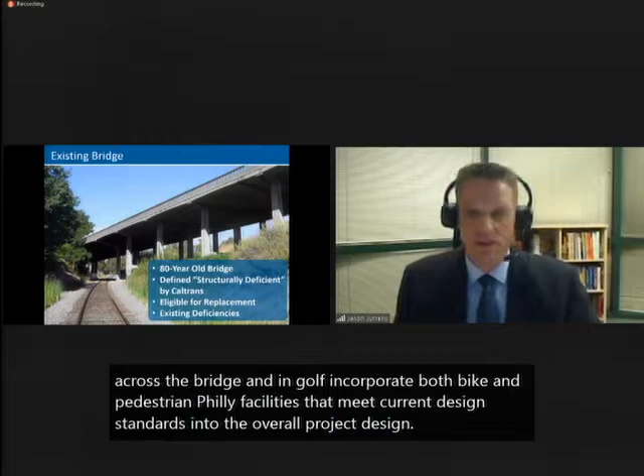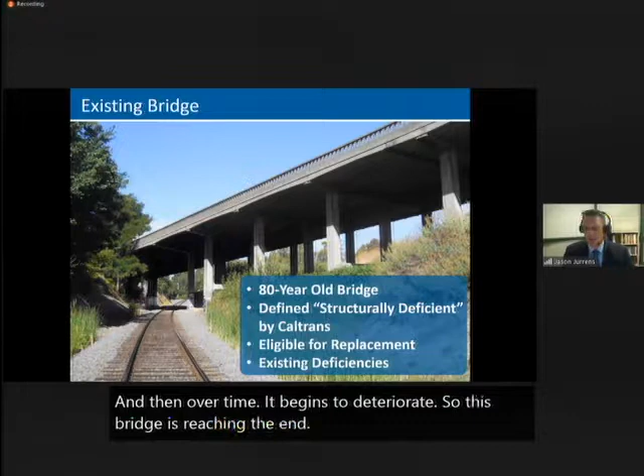So the existing bridge is an 80-year-old bridge. It was built in the 1930s. It is defined structurally deficient by Caltrans. So as all infrastructure ages, over time, it begins to deteriorate. So this bridge is reaching the end of its service life. It is eligible for replacement under a Caltrans and FHWA highway bridge program that will fund a portion of the bridge replacement cost.

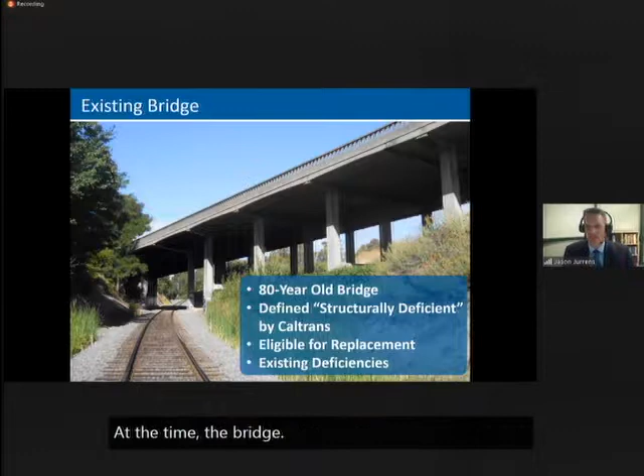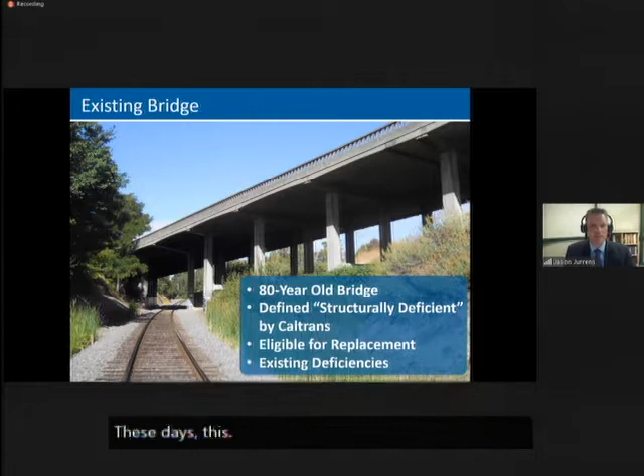So I really like this picture. This is a modern picture, but it could have been taken back in the 1940s. At the time the bridge was designed and constructed, it was really state of the art from a bridge design standpoint, and then also from a railroad standpoint. These days, this would not meet modern design code from a structural standpoint or from a railroad access standpoint. So these will be enhancements that the new bridge will incorporate.

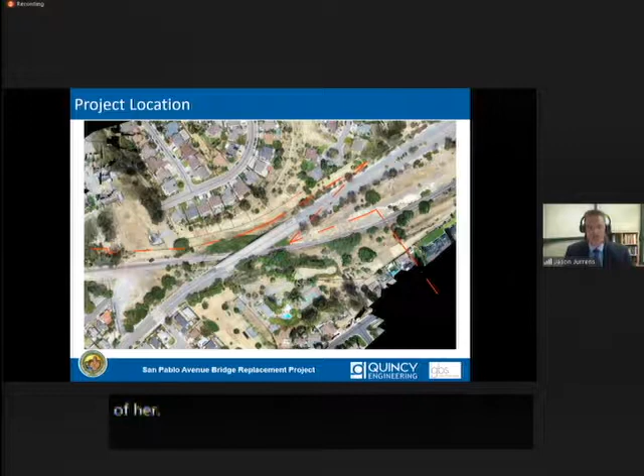So a little bit about the project location. The project, as most folks know, is kind of in the north corner of the city of Pinole. So on the lower left-hand side of this slide, that's the city of Pinole. The red dashed line is the city limits, and then the upper portion of this slide is the city of Hercules. The city of Pinole is the project proponent, but as Misha said, we're working very closely with the city of Hercules as we develop this project.

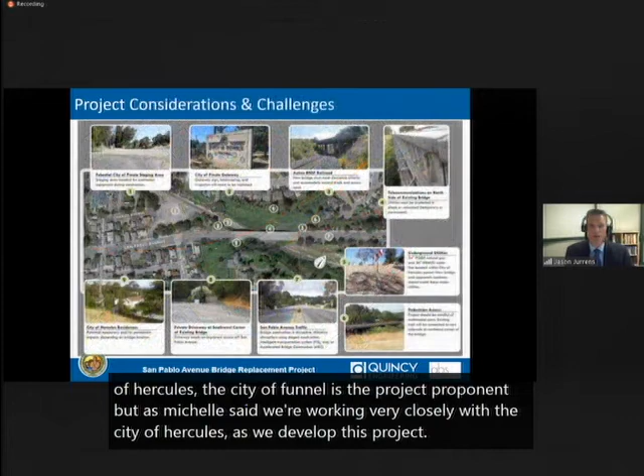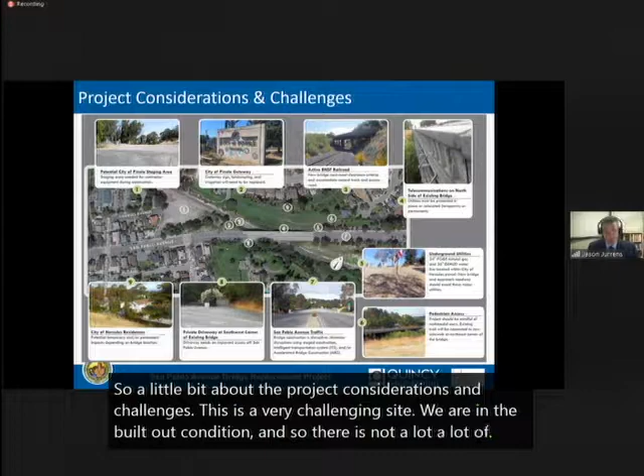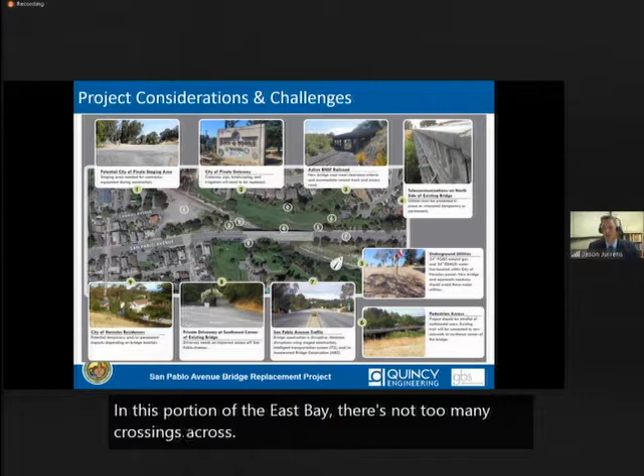So a little bit about the project considerations and challenges. This is a very challenging site. We are in the built out condition, and so there is not a lot of room. Everything is pretty tight and pretty compact. And so just kind of working our way through this slide, the main driver is traffic on San Pablo Avenue. San Pablo Avenue is a parallel facility to Interstate 80. In this portion of the East Bay, there's not too many crossings across the railroad, so this really is a critical link to get from one side of the railroad to the other.

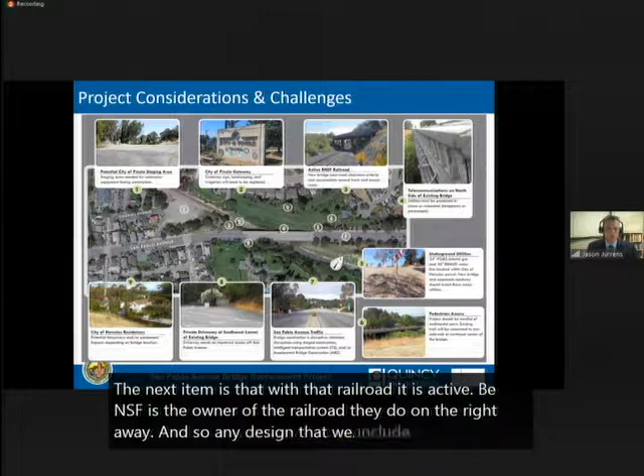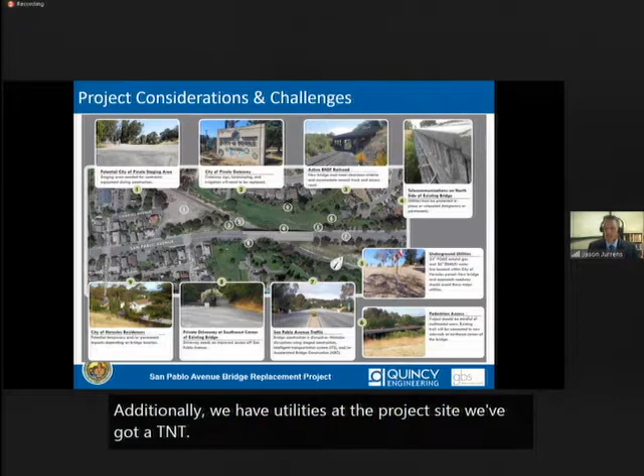The next item is that the railroad is active. BNSF is the owner of the railroad. They do own the right-of-way, and so any design that we incorporate will have to meet BNSF standards for modern design criteria. Additionally, we have utilities at the project site. We've got AT&T on the exterior of the bridge on the north side. And then within a City of Hercules public utility easement, we do have a pair of large diameter East Bay MUD water lines, and then also a large diameter PG&E natural gas main.

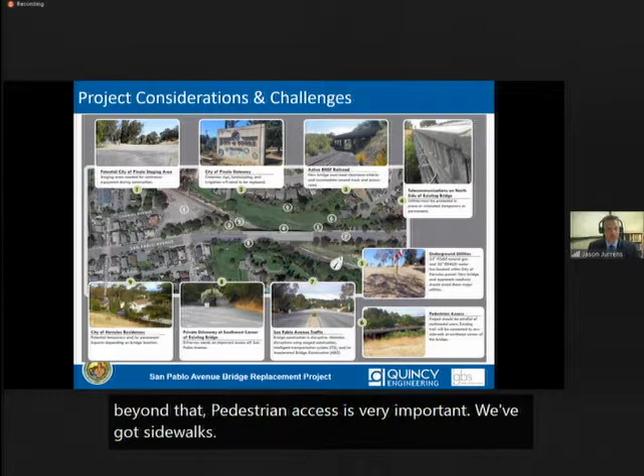Beyond that, pedestrian access is very important. We've got sidewalks on each side of the bridge. We want to facilitate multimodal access across the bridge. We also have a pedestrian path between Hercules by the Bay residents and the existing bridge that we would like to connect.

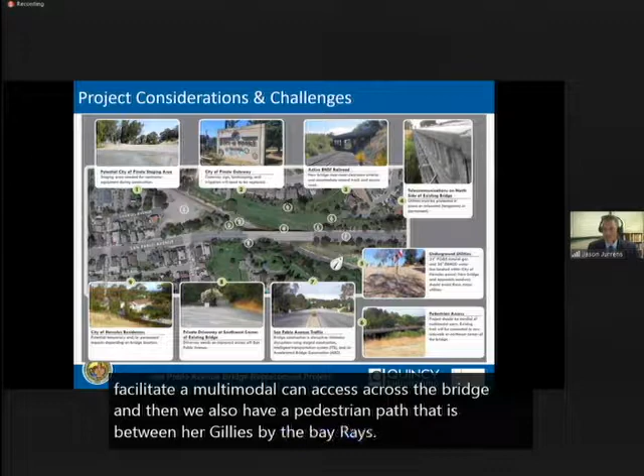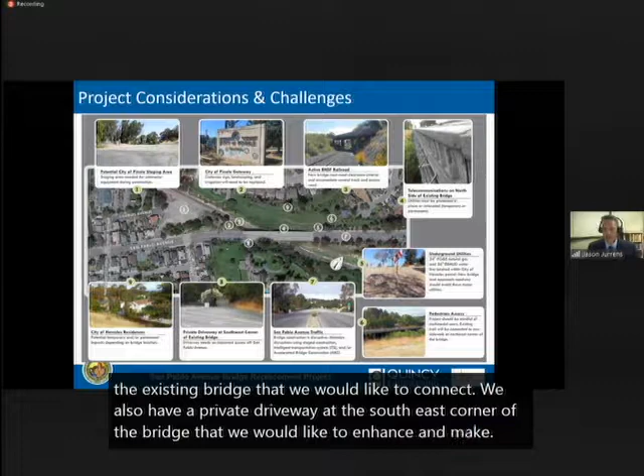We also have a private driveway at the southeast corner of the bridge that we would like to enhance and make quite a bit safer. And then lastly, as I mentioned, for the City of Hercules residents at Hercules by the Bay, we want to be very mindful as to the location of the bridge in relation to residents, as to where people live.

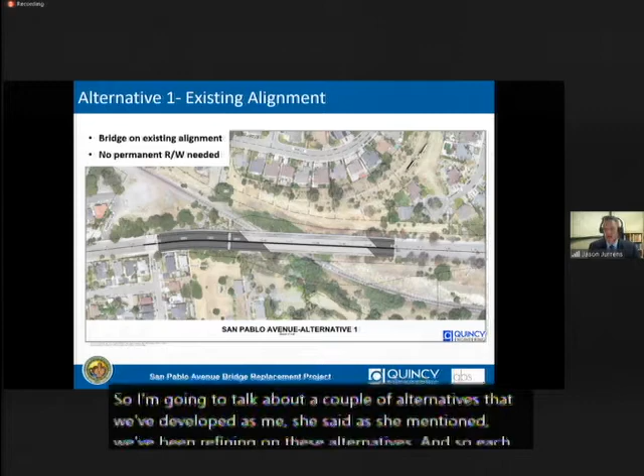So I want to talk about a couple of alternatives that we've developed. As Misha mentioned, we've been refining these alternatives. Each of the alternatives does incorporate two 12-foot traveled lanes and 8-foot outside shoulders in both the northbound and southbound direction. Those shoulders double as class 2 bikeways.

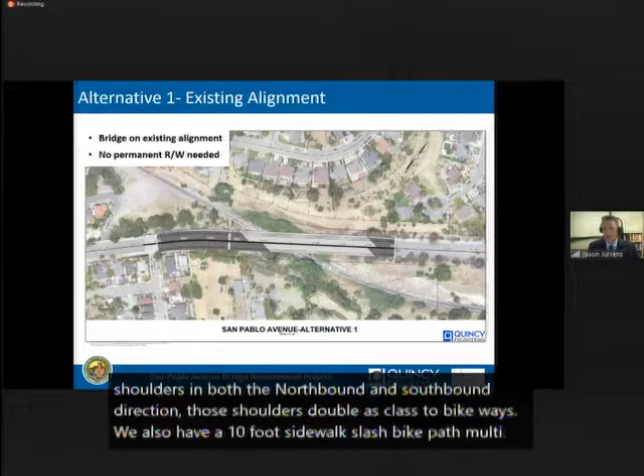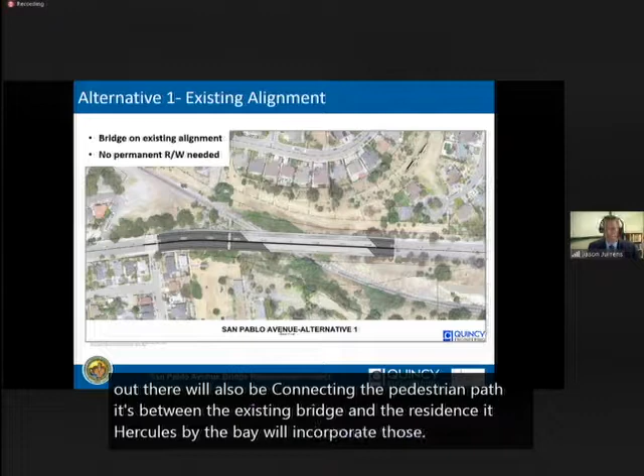We also have a 10-foot sidewalk slash bike path, a multi-use path on the west side that connects to the existing sidewalk infrastructure that's already out there. We'll also be connecting the pedestrian path between the existing bridge and the residents at Hercules by the Bay, and incorporating that into the design as well. So all designs will meet current roadway and bridge design standards, and will be ADA compliant.

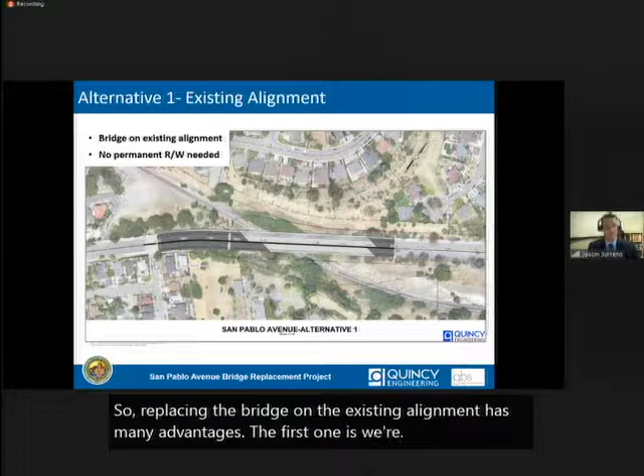So the first alternative we want to talk about is Alternative 1, which is replacing the bridge on its existing alignment. This has many advantages. The first is that we're putting the bridge back in its existing location. There's a reason the engineers originally put the bridge in that spot—it's the best spot for the bridge.

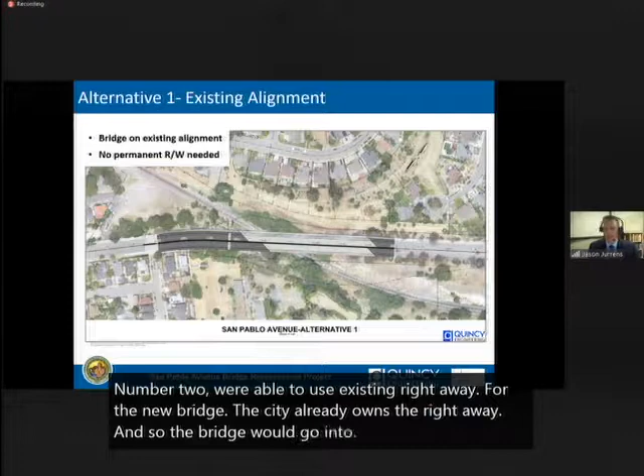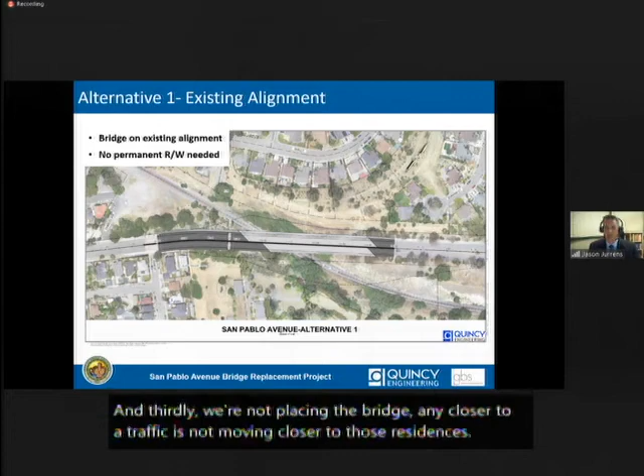Number 2, we're able to use existing right-of-way for the new bridge. The city already owns the right-of-way, so the bridge would go into that existing right-of-way. And thirdly, we're not placing the bridge any closer to, or moving traffic any closer to, those residences at Hercules by the Bay. So in order to build a bridge, we need to maintain traffic on San Pablo Avenue.

This alternative would construct a temporary detour, a 2-lane detour that would skirt around the west side of the existing bridge. We would install a temporary bridge, and traffic would use this 2-lane facility during the duration of construction. We've done some traffic modeling.

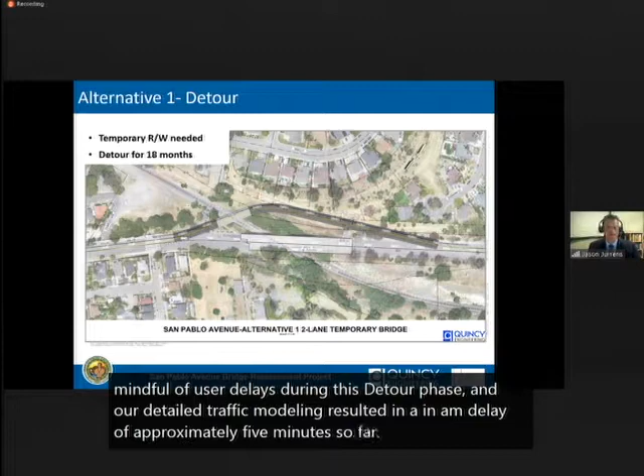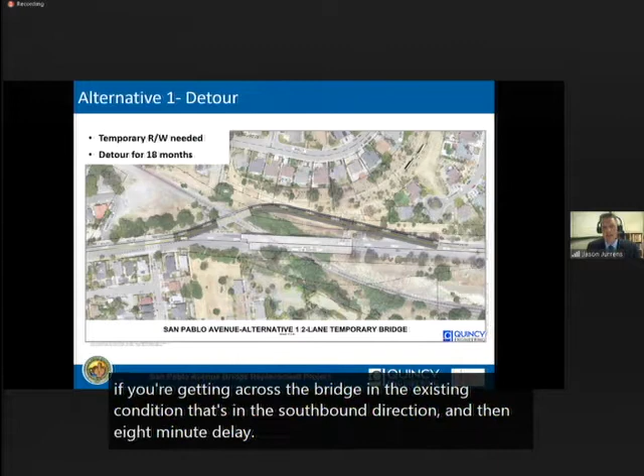We're mindful of user delays during this detour phase, and our detailed traffic modeling resulted in an AM delay of approximately 5 minutes beyond the existing travel time across the bridge, in the southbound direction. Then there's an 8-minute delay in the PM peak, in the northbound direction.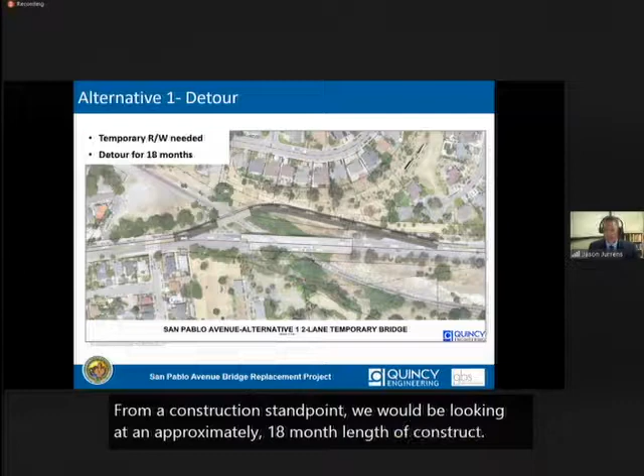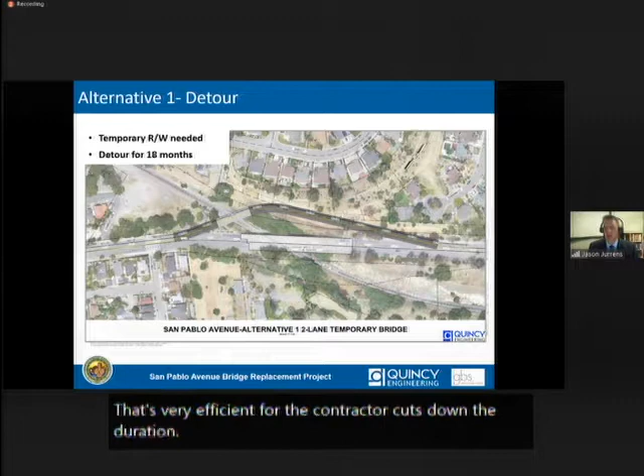Based on those traffic numbers, the project development team felt that was a reasonable amount of delay to accommodate for construction. From a construction standpoint, we'd be looking at approximately 18 months to construct the bridge, building it in one single stage. That's very efficient for the contractor—it cuts down the duration and is more economical as well. All of these features combined led us to Alternative 1 being a very good alternative.

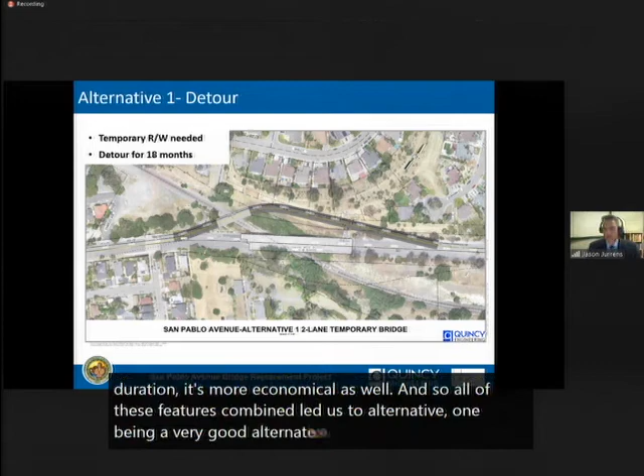The second alternative we've developed is placing the bridge on a parallel alignment. This alternative, as mentioned, does place the bridge closer to the residences at Hercules by the Bay. In this configuration, we would reduce the width of the travel lanes on San Pablo Avenue, with 2 lanes in the northbound direction and 2 lanes in the southbound direction during the first stage of construction.

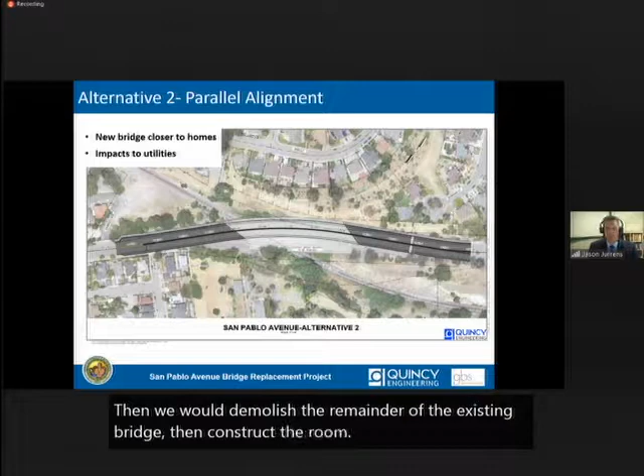We would then remove a portion of the existing bridge and construct a portion of the new bridge parallel to it. Once that portion of the new bridge was constructed, we would move traffic onto it, consisting of those same 4 lanes, although narrowed, with a posted speed limit of 25 miles per hour. Then we would demolish the remainder of the existing bridge, construct the remainder of the new bridge, and put traffic in its final configuration.

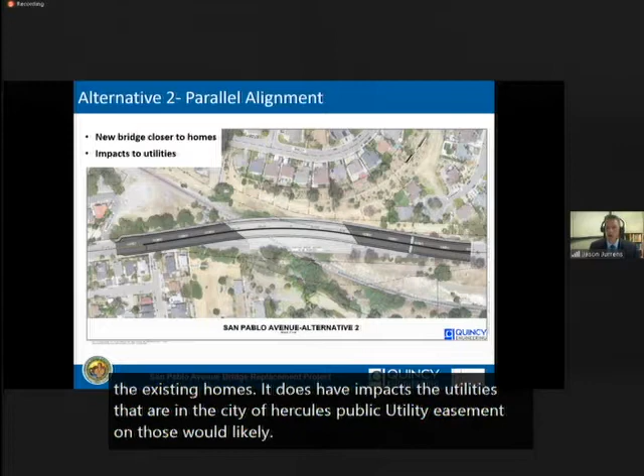As I mentioned, it does bring the bridge closer to the existing homes. It does have impacts to utilities in the City of Hercules public utility easement, which would likely require relocation. So overall, this is a viable alternative—it just has a different set of impacts than Alternative 1.

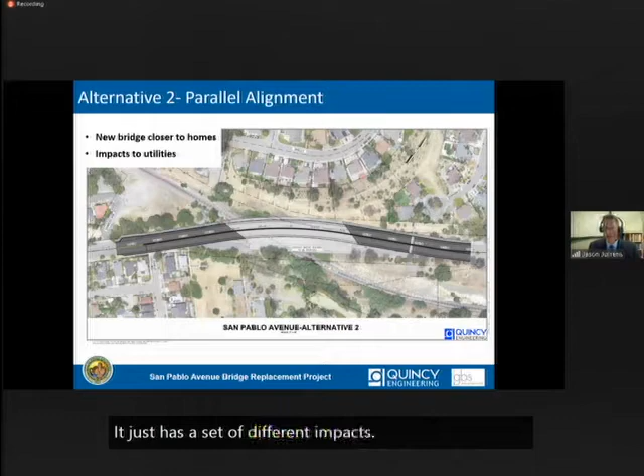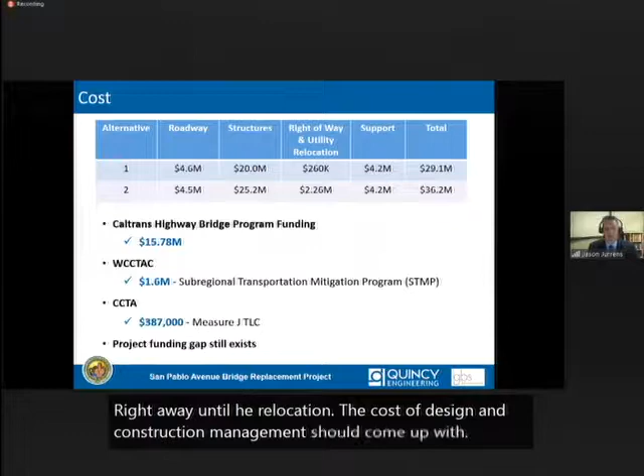So from an overall cost standpoint, we did a fairly detailed cost estimate and determined the cost of the roadway, the bridge structure, right-of-way and utility relocation, the cost of design and construction management to come up with a project total for alternative one of $29.1 million.

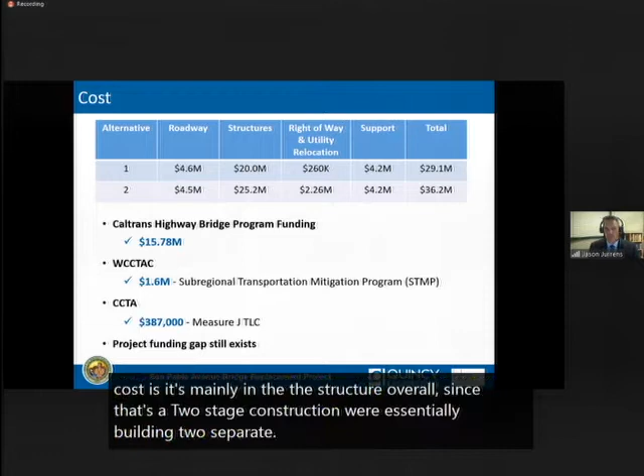For alternative two, that same estimate is $36.2 million. So you can see where the difference in construction cost is. It's mainly in the structure overall, since that's a 2-stage construction. We're essentially building 2 separate bridges right next to each other and connecting them together.

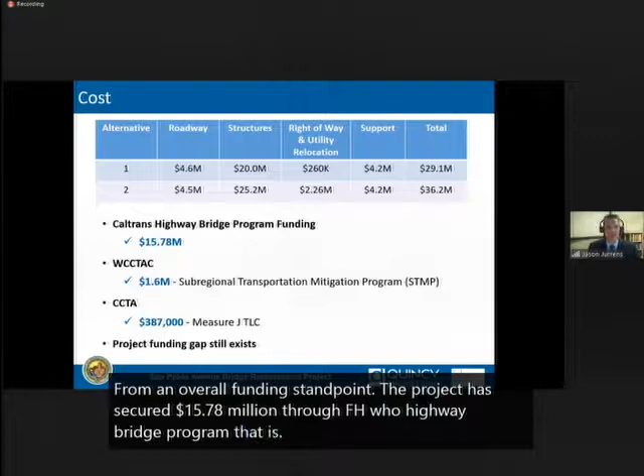From an overall funding standpoint, the project has secured $15.78 million through FHWA's Highway Bridge Program, administered down through Caltrans. We've also received $1.6 million of sub-regional transportation mitigation program funding through WCCTAC, an additional $387,000 through CCTA and the Measure J funding.

So a funding gap still exists, and as we're working through the project development process, we're continuing to look for funding to completely fund this project.

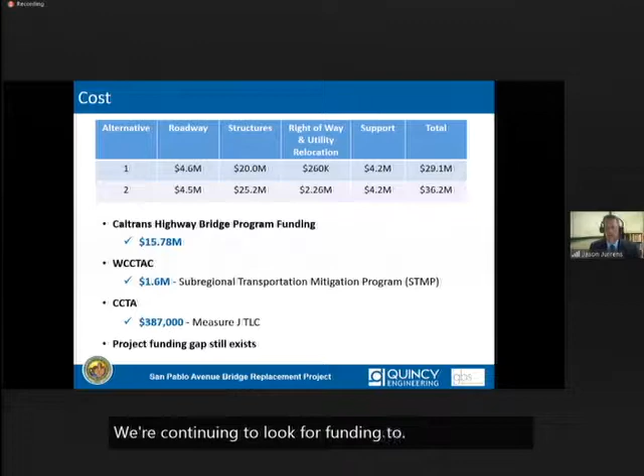So once we've developed alternatives, determining what is the best alternative, the best value alternative, is very important to understand which configuration provides the best value. So we've gone through a value analysis to try to help us find out which of these 2 alternatives gives us the best value. So working with the design team and the project development team, we came up with what we thought were the 4 most important criteria when looking at value as it relates to the 2 separate alternatives.

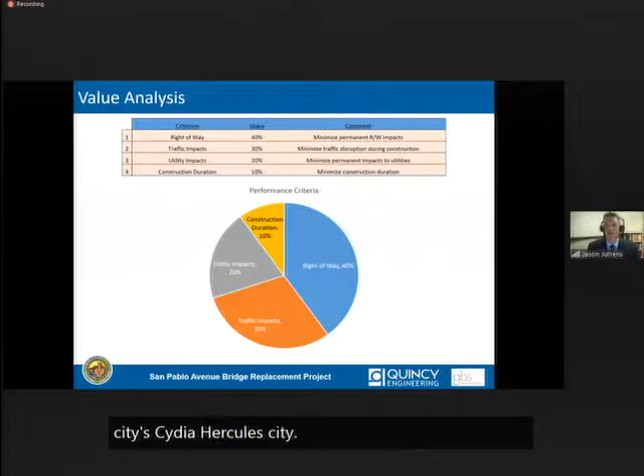So we looked at right-of-way, traffic impacts, utility impacts, and construction duration. Based on input from the cities, City of Hercules, City of Pinole, and then our own collective judgment, having done bridge replacement projects, we felt that right-of-way was the most important factor. So we want to minimize permanent right-of-way impacts. We felt that should get an overall share of 40%, the most important factor.

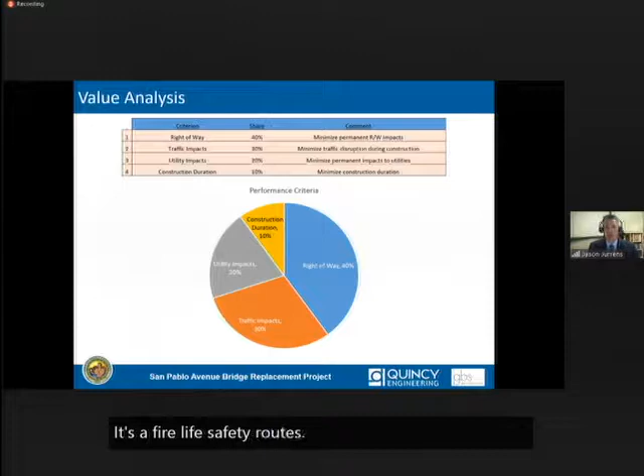The next most important factor was traffic impacts, not just for people living adjacent to the bridge project, but it really is an interregional route. It's a fire life safety route, so we felt that had a relative importance of 30%. Utility impacts, 20%, relocating the existing utilities that are there is going to be very, very disruptive, very costly. So we felt that was very important.

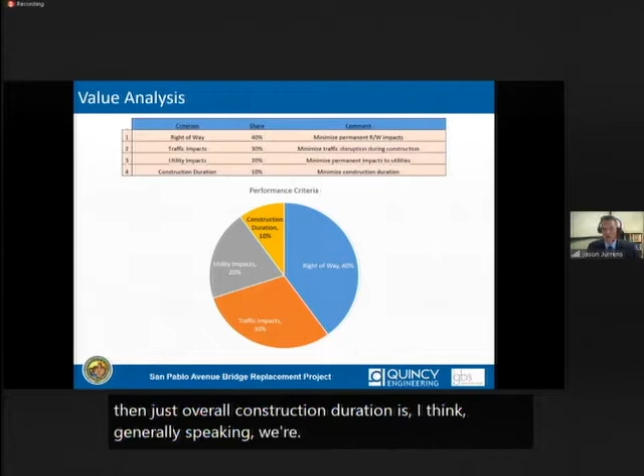And then just overall construction duration - I think generally speaking, we're all fairly tolerant of construction duration as long as we get in there, do the work, and then get done. And so those add up to 100%.

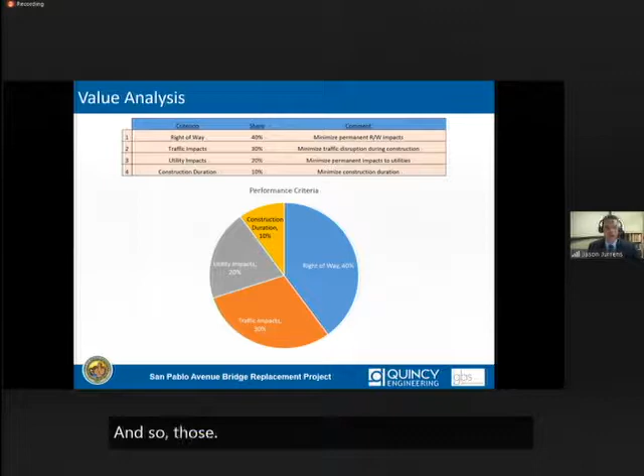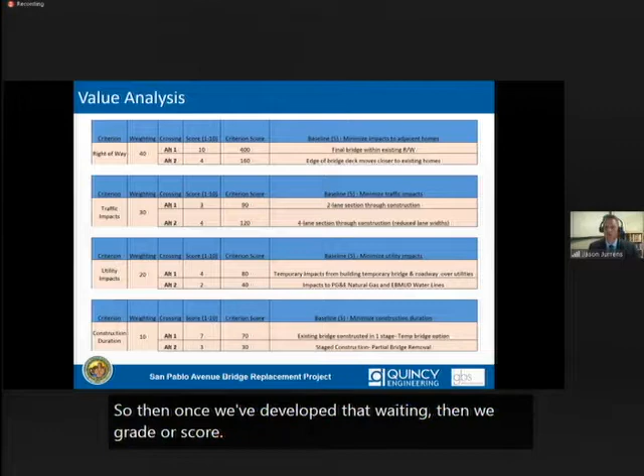So then once we've developed that weighting, we grade or score the two alternatives against each other. In the case of right-of-way, we want to score that impact as it relates to the final bridge being within the existing right-of-way and not being outside of it. And so that got a high score, a 10.

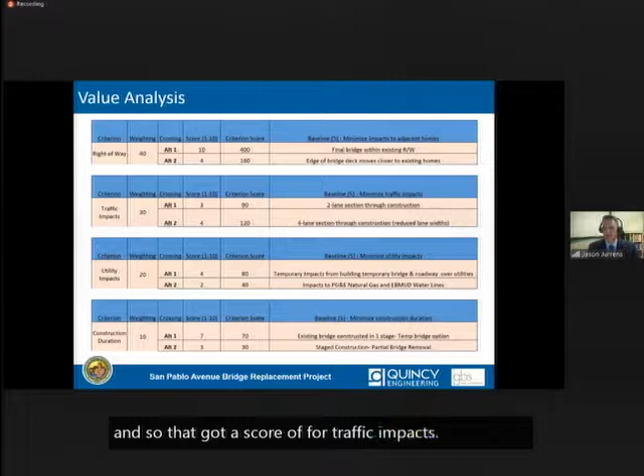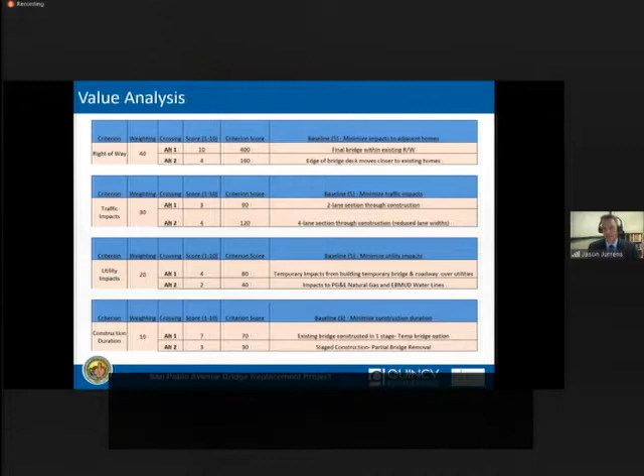On alternative 2, the edge of the bridge deck is moving closer to the existing homes, so that got a score of 4. Traffic impacts: alternative 1 got a score of 3 - the 2-lane section is disruptive during the duration of construction. Alternative 2, we scored that a 4. That's a little bit less disruptive, but because we're going to have a temporary traffic condition for a longer duration of time, it was just marginally better in our estimation.

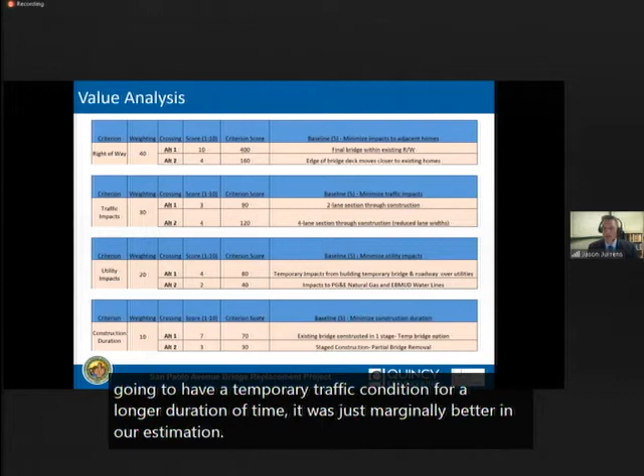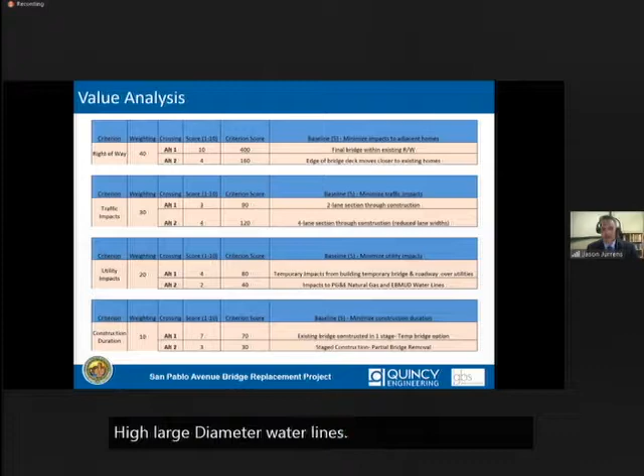From a utility standpoint, alternative 1 has temporary utility impacts, so we scored that a 4, whereas alternative 2 was more impactful, having permanent impacts to both the PG&E natural gas main and also the EBMUD large diameter water lines. And then lastly, construction duration: alternative 1, with its single stage bridge construction, we scored as 7, while alternative 2, because it's a little bit longer construction, we scored a 3.

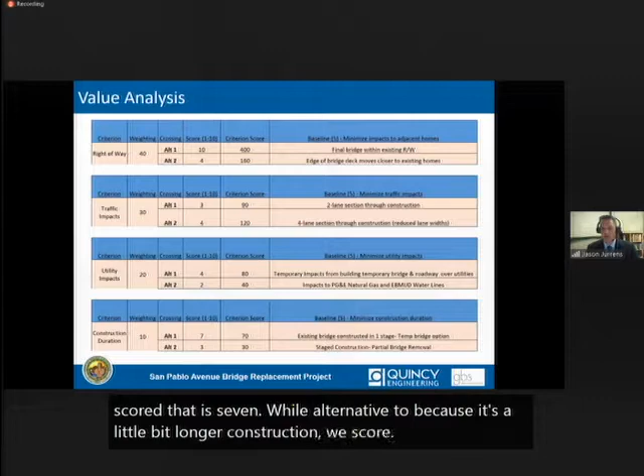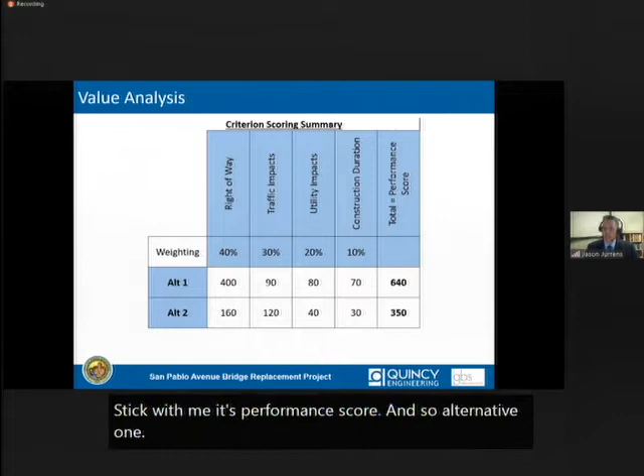So in order to develop a score, we take the weighting times the overall score, and that results in a criterion score. Then we sum those scores up, and that gives us our performance score. Stick with me, it's a performance score. Alternative 1, we came up with a performance score of 640, and alternative 2, a performance score of 350.

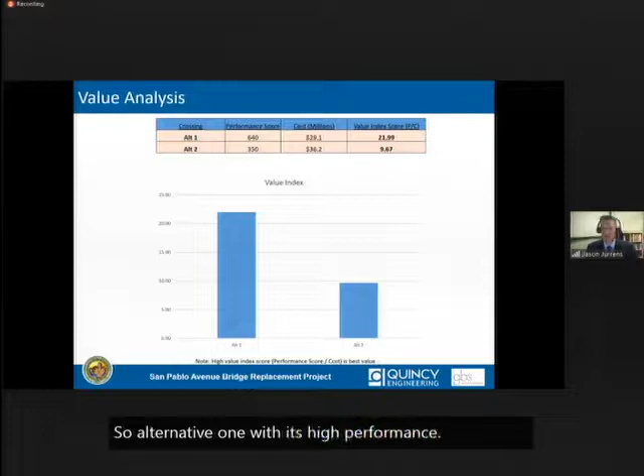Once we had that performance score, we were able to apply the cost to get a value index. If we take the performance score divided by the cost, that gives us our value index score. So alternative 1, with its high performance and relatively low cost compared to alternative 2, resulted in a value index of 22, whereas alternative 2 has a value index of 9.67.

Now, the actual number is not all that important. What is important is their relative difference. So the high value score results in the best value. Based on this criteria that we defined, alternative 1 is the alternative that creates the best value.

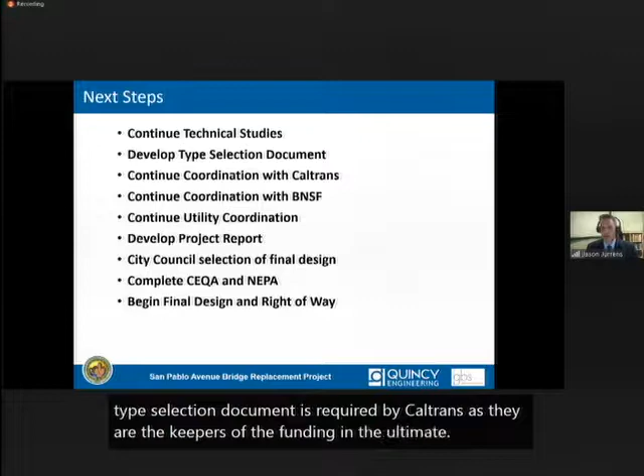So next steps, we're going to continue technical studies, continue refining our design. We're in the middle of the environmental process right now. We'll be moving forward with a type selection document as it relates to the road and the bridge. That document is required by Caltrans as they are the keepers of the funding and the ultimate approver. So we'll continue to coordinate with Caltrans, with BNSF, and with utilities, with East Bay Mud, PG&E, and AT&T.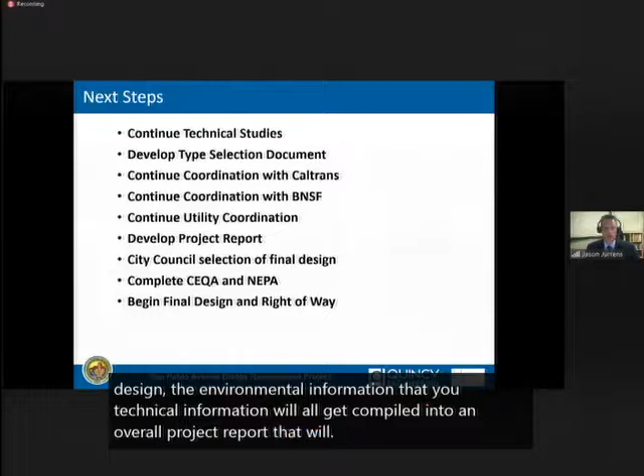All this information that we've developed—the design, the environmental information, the geotechnical information—will all get compiled into an overall project report that will be the backbone of the project, one complete document with all of the information. Once this is complete, we'll be moving through CEQA, the California Environmental Quality Act side, and that's through the city of Pinole as the lead agency.

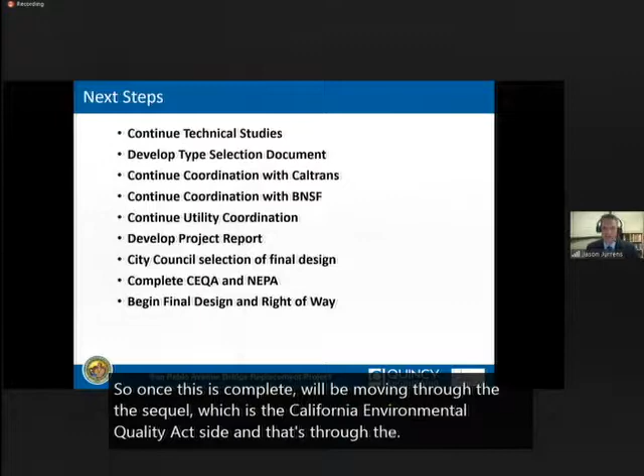So the city council of Pinole will ultimately be the one selecting the final design. On the NEPA side, that's the National Environmental Policy Act. That's delegated from FHWA through Caltrans, and Caltrans will be approving that national environmental document.

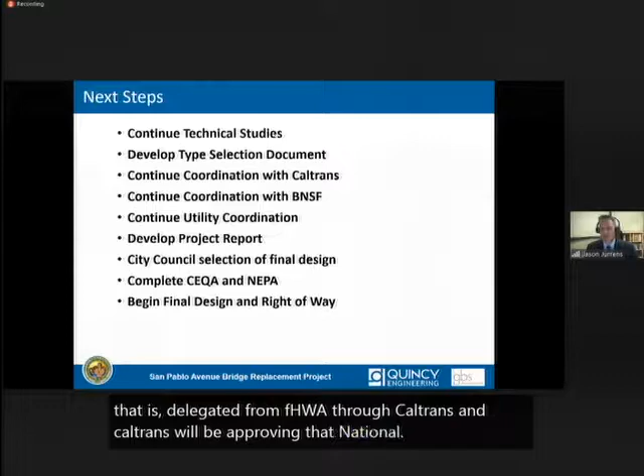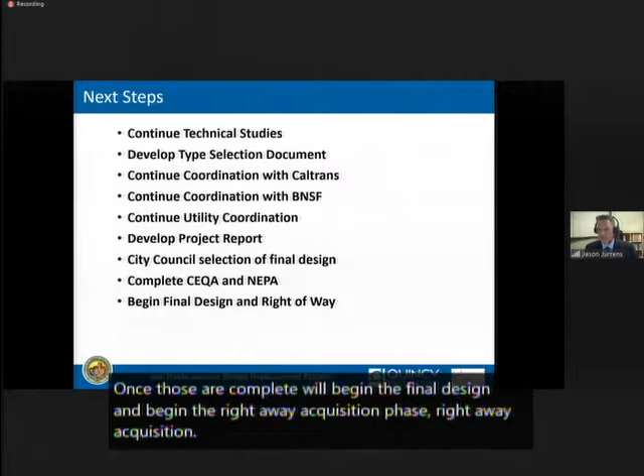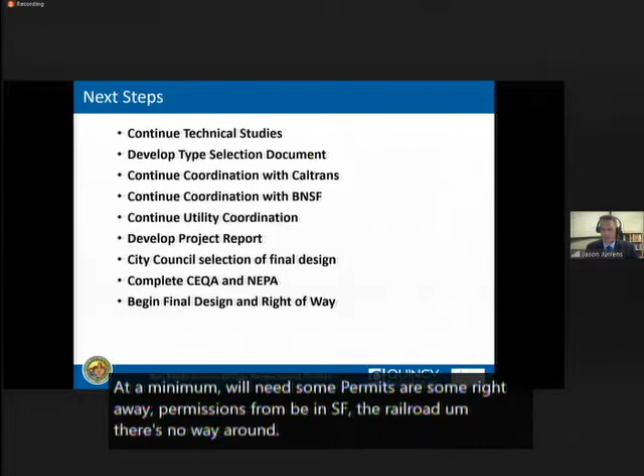Once those are complete, we'll begin the final design and begin the right-of-way acquisition phase. Right-of-way acquisition, if needed, at a minimum, we'll need some permits or right-of-way permissions from BNSF, the railroad. There's no way around that, so we'll be getting that. And then we'll also push into final design, developing the documents needed for construction.

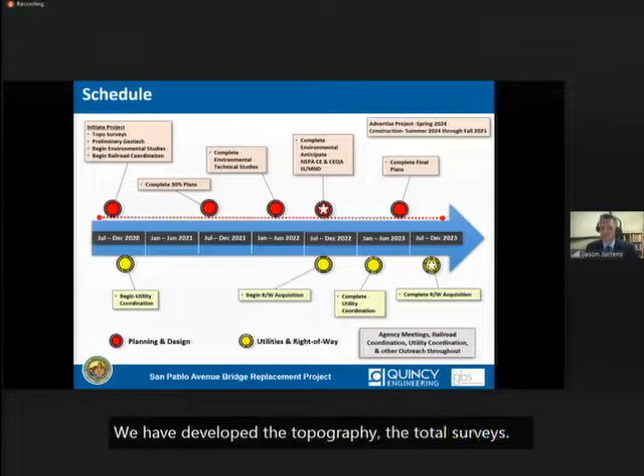So from an overall schedule standpoint, we have developed the topography, the topo surveys. We've used that for our preliminary 30% design. We've performed the geotech, the environmental studies, the railroad coordination has begun, and then also the utility coordination.

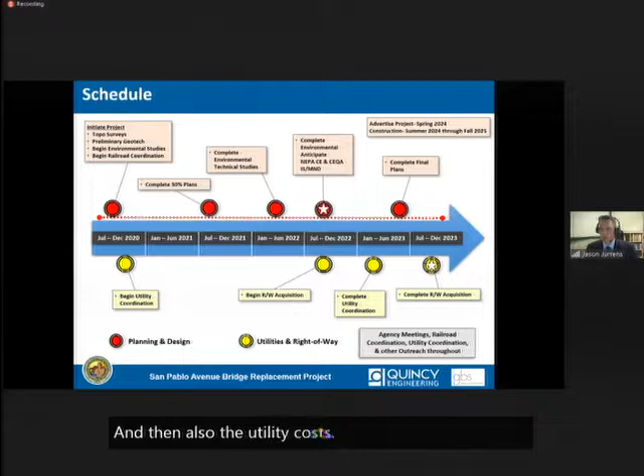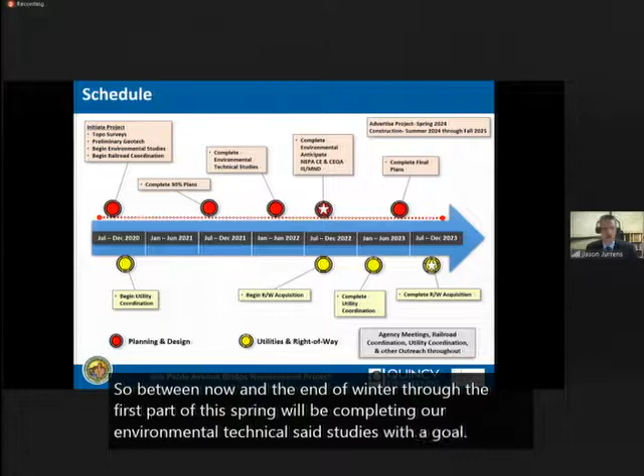So between now and the end of winter through the first part of spring, we'll be completing our environmental technical studies, with a goal of having CEQA approvals and NEPA approvals in the middle of summer. It's at this point that the right-of-way phase can begin, and the final design phase can begin.

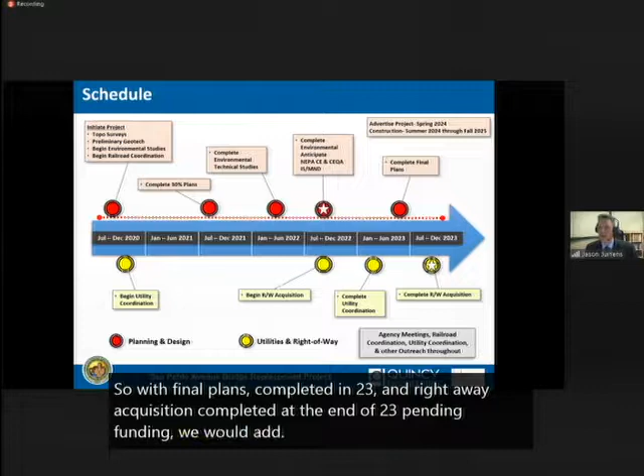We'll continue to coordinate with utilities and complete final plans in the middle of 2023. So with final plans completed in '23 and right-of-way acquisition completed at the end of '23, pending funding, we would advertise the project in spring of '24 and then likely construct from summer of '24 through fall of '25.

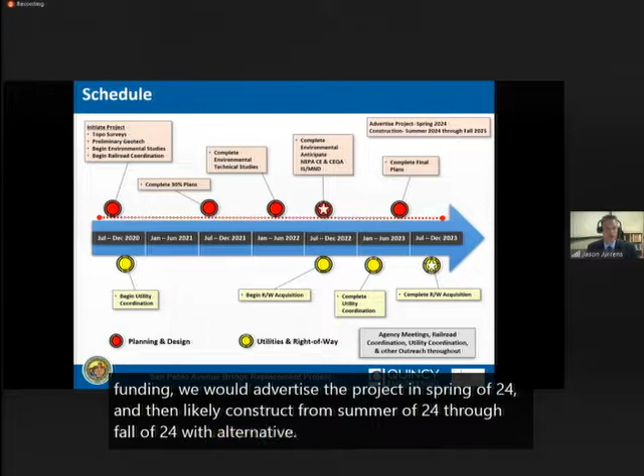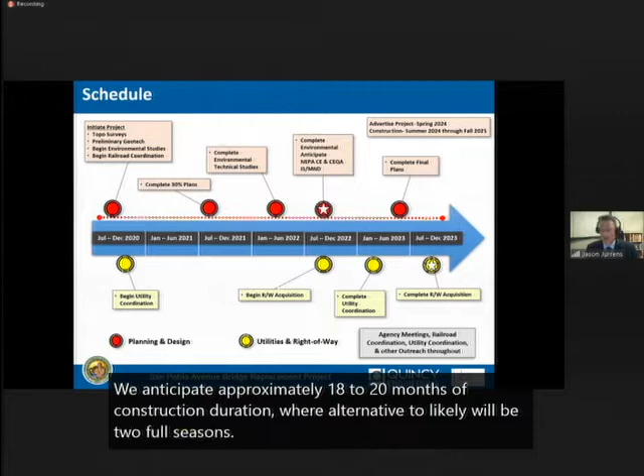With alternative one, we anticipate approximately 18 to 20 months of construction duration, whereas alternative two likely will be 2 full seasons of construction. All the time we're doing this development, we'll be having agency meetings, permitting meetings, railroad coordination, and other outreach throughout.

So with that, we'd be glad to take any questions.

Michelle, I think you were going to open it up to Q&A at this point. Yes, we have quite a few questions.

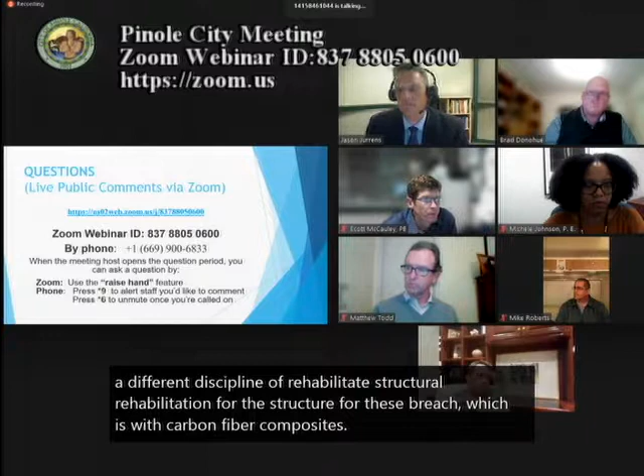I work in the field of structural rehabilitation, and one of the questions I have is it seems you guys have not been exposed to a different discipline of structural rehabilitation for this bridge, which is carbon fiber composites. These composites are widely used by all DOTs across the country, including Caltrans quite a bit, and they certainly have the ability to meet all the deficient elements in the bridge that need to be reinforced, potentially leaving the bridge in place and just strengthening it to whatever degree is needed. Obviously, with that, you have no road...

impact and reconstruction. You keep the peace with the residents and the businesses. You don't impact commute traffic, parking, and all the disruption this project would entail. With something like this, you would most likely already have the funding to strengthen this bridge, and the schedule for it would also be a fraction of what's planned.

I don't know if it's possible to perhaps meet with Jason and expose him to these disciplines.

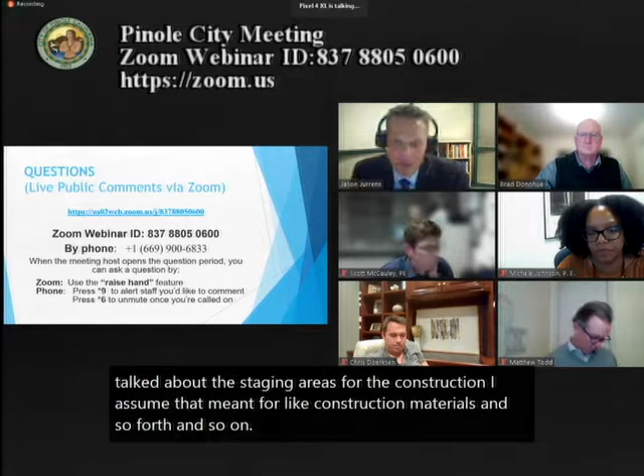I just have one question. When you talked about staging areas for the construction, I assume that meant for construction materials and so forth, or did that include the construction workers parking? It'll likely be a combination. And so as we get through the bridge type selection, really understand what type of bridge is going to be the likely bridge type, then we'll understand a little bit more of the space that is required.

Traditionally, over railroad tracks, we do some kind of a girder construction. So in this case, that would need to be either a precast concrete girder or steel girder. In this case, it's likely to be a precast concrete girder. And what's nice about that is once you build the supports and the foundations, those girders come in and typically they're lifted into place.

And so, pretty much overnight, you have a good working platform on the bridge. So traditionally it takes a little bit less space. But I could see us using a portion of the city property off of Charles potentially for worker parking, and then that triangular parcel that's closer to the bridge for staging of materials.

What's nice about the detour also in moving traffic away from the existing bridge is the approach roadway up to the existing bridge no longer has traffic on it. You can start to stage your equipment and material in that approach roadway. So that creates a little bit more space as long as you can keep the traffic moving on the detour. But there's going to be a lot of equipment. There's going to be a lot of people working on the project in various stages.